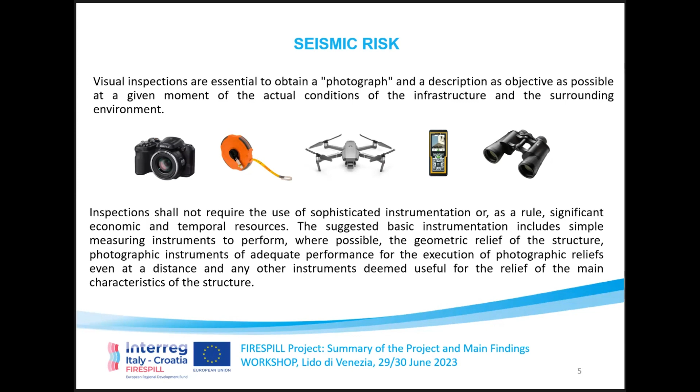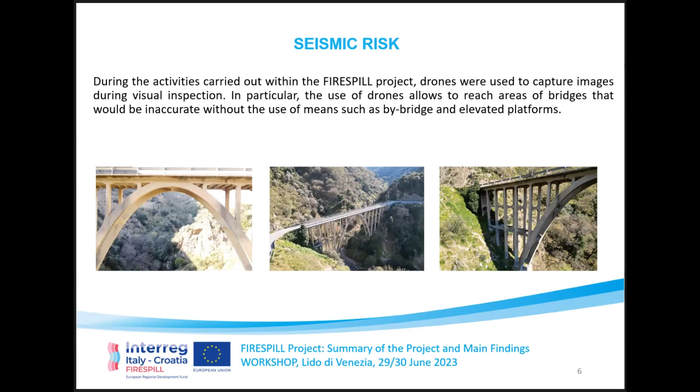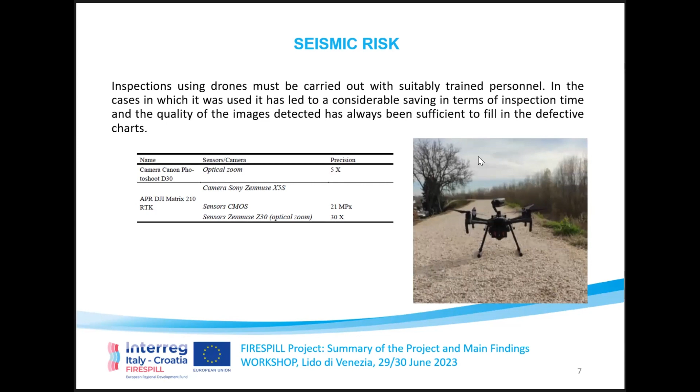During the activities carried out in this project, drones were also used to capture images during this visual inspection. In particular, the use of these drones allows reaching areas of bridges that could be inaccessible without the use of bridge inspection units or platforms. The inspection using these equipments must be carried out by trained personnel. Here we can see some characteristics and equipment of these drones, so our instrumentation.

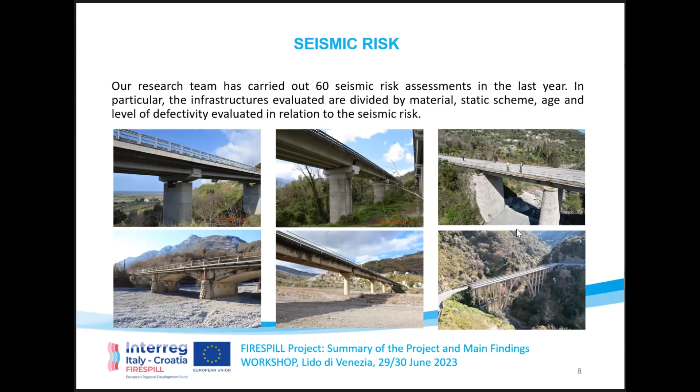So the research team for this part has carried out 60 seismic risk assessments in the last year. Here we can see a series of photos for different types of bridges. These infrastructures were divided by material, static scheme, age, and the level of defectivity that will be evaluated in relation to the seismic risk.

Based on this survey, the most common level of defectivity is medium, and this reflects the fact that almost half of these infrastructures were built after 1980. Most of the defects found concern the support devices. This is very important if we think about an earthquake. And this parameter, the defectivity, will affect the level of seismic vulnerability.

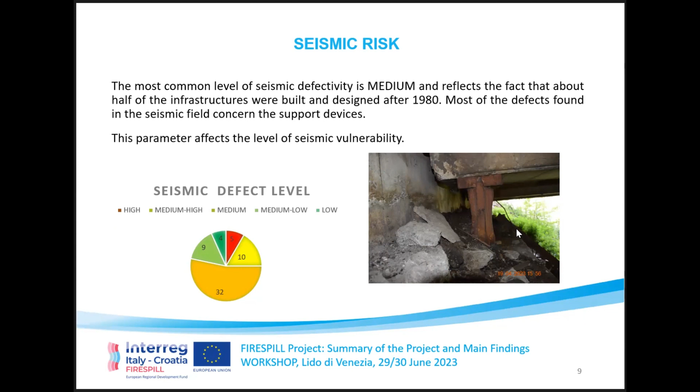This deterioration directly impacts the evaluation of this vulnerability, and the deterioration scenario collected during the surveys in this project showed a strong correlation between the defect levels and the related seismic vulnerability evaluation. Looking at the results, almost half of the cases are in a medium class of vulnerability, 25% in a medium high class, and 10% in a high class of vulnerability.

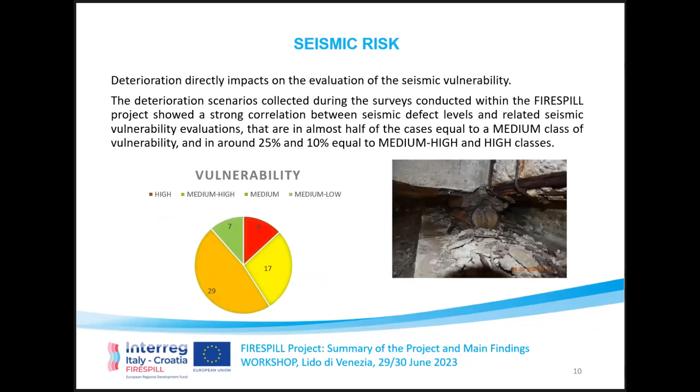Okay, I will proceed. After having contributed to enforce the skill and the capabilities of the Veneto region fire brigades in the field of technical triage, our department expanded the target audience. So, considering the importance of expeditious surveys for the adoption of appropriate measures in the post-seismic phase by the competent territorial bodies, a seminar called Operational Indication for the Coordination of the Impact Assessment and Damage Survey Activities and Post-Seismic Usability of Buildings was organized at the end of June at our department.

This one was addressed to AEDES qualified technicians, local government officials, and civil protection, with the aim to obtain a coordination in the activities between the fire brigades and the civil protection and these technicians that are involved after seismic events.

Okay, so moving to the last part of our activities. As I said before, there was also an investigation of the earthquake-fire interaction in different types of structures. So pre-stressed concrete structures, steel structures, wood structures and masonry structures. Here, I just briefly pointed out the objectives.

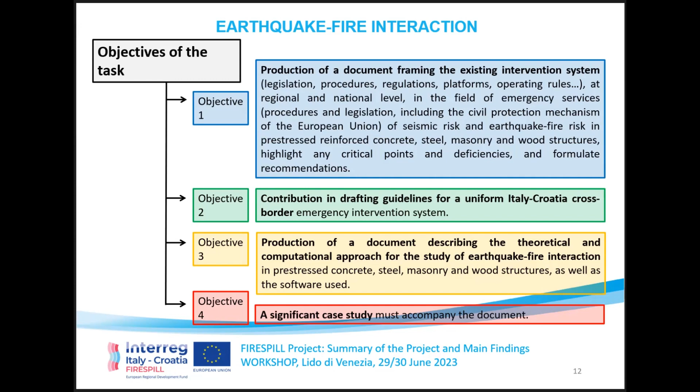And the last two objectives were the production of a document describing the theoretical and computational approach for the study of this interaction. And finally, a significant case study was inserted in the document for each type of structure. So let's go directly, because I have no time, to the last two objectives, in the technical part.

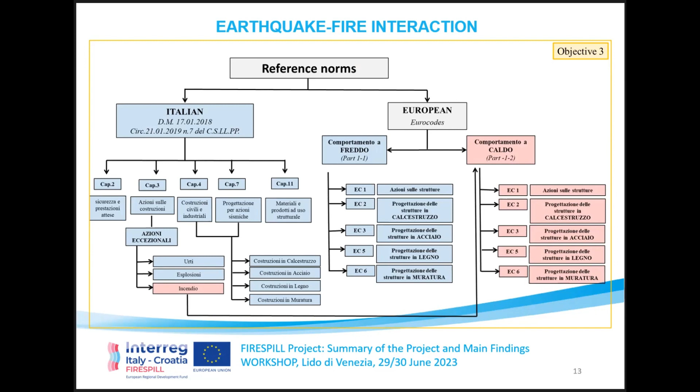Here, I just put together the standards that found application in this work. In particular, here we have the DM of 2018, it being understood that with regard to exceptional actions such as fire, the same refers to the application of the Eurocode, as far as it involves the behavior of the different structural types.

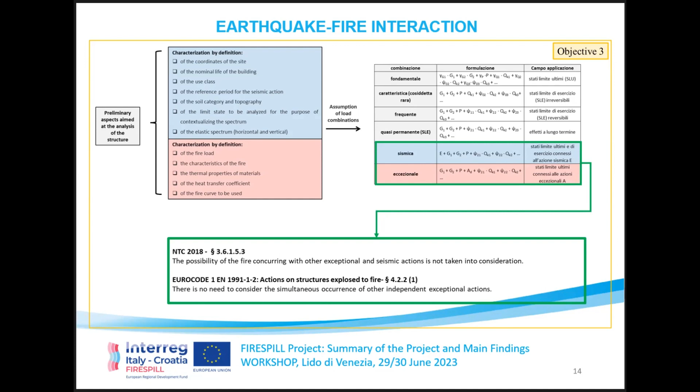And as can be seen here in this slide from the chart above, the standard provides for two distinct load combinations, one seismic and one exceptional. Therefore, there is no concurrence of the two actions. Similarly, Eurocode 1 points out that there is no need to consider the simultaneous occurrence of other exceptional actions.

So, the work done here in the FIRESPILL project was, let's say, a numerical work that was done considering different types of structure, and the numerical models that we will see here were done in Abaqus.

In the particular case presented here, we will start from the first structure that is made of steel. The application of actions was considered as a sequential application. First of all, we have the vertical load, then we assume a horizontal action of seismic nature, and then at the end, the exceptional action. So we conducted an entire analysis from the beginning till the end, considering this sequence.

So in this slide here, we just put, okay, let me, okay.

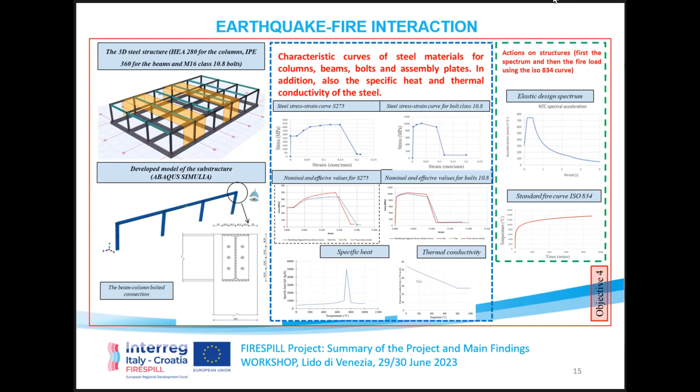In the central part, we have the characteristic curves of our materials, the steel used for the structure and then for the bolts. And we also have the specific heat and thermal conductivity of steel. Everything was considered with the variation, considering the seismic event and also the fire event after this. Special attention in this first analysis was given to the connection, applying, as mentioned above, the elastic spectrum and then the ISO fire curve.

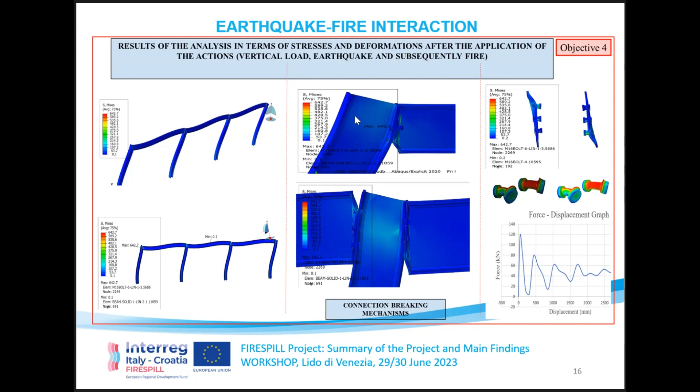One thing that I forgot to mention before is that in the figure on the left, the deformation of the substructure was related to the vertical load and after the seismic load. While in this figure here, we see the results of the stresses at the end of the analysis, so with the fire curve applied after the seismic events.

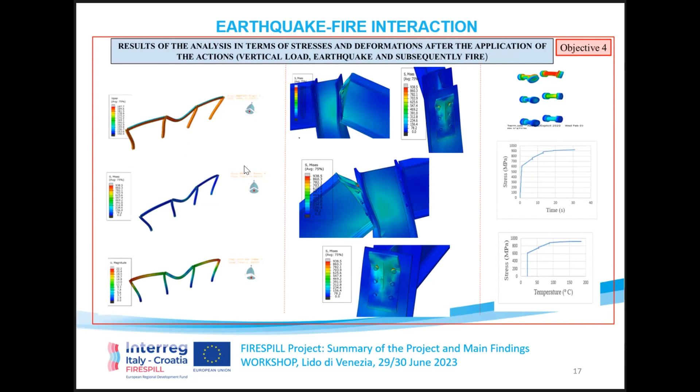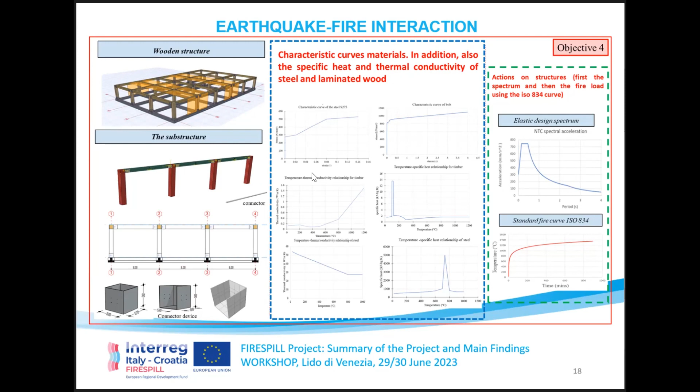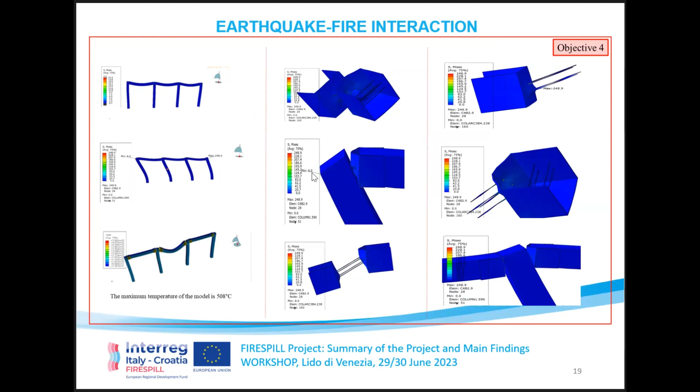While in this second figure here, for the same wood structure, we have considered the stresses at the end. What I didn't point out before, and I would like to point out here, but also for the previous example, is that in the case of this connection we have a rise of our stresses when we move from the seismic event and proceed to the fire event. So passing from one event and adding the second one, we will have almost a 50% increment of stresses at the end in the connection. So it's important to understand better these points in the structures.

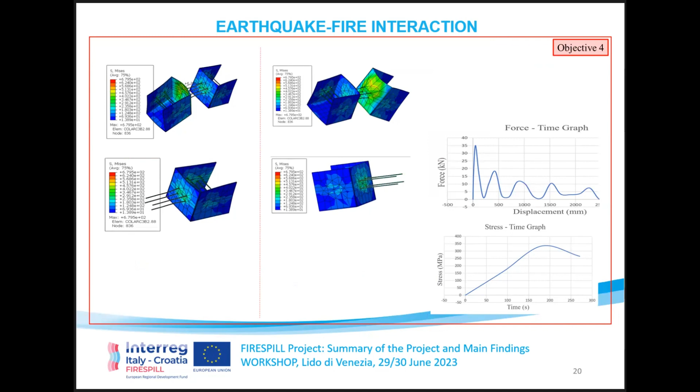Okay. Sorry, this is not the last, we have just a last slide on the masonry structure. We have before the pre-stressed concrete structure here. In this case, we consider a concrete structural element that was forming part of the roof of an industrial building. All the analyses were done in Abaqus. Here we analyzed, first of all, a 1 meter element of this part of the roof of the building, to calibrate the thermomechanical behavior of our material.

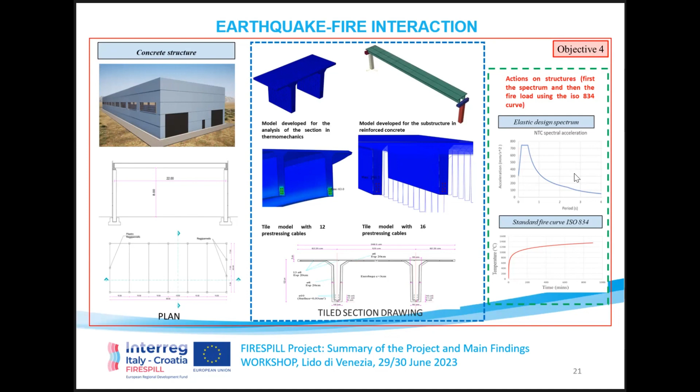Here is reported the geometry. As before, we reported the actions that were applied in the same manner with the same sequence. And here we can see some results: the thermomechanical analysis related to the 1 meter long tile section, the stress contour for the different steps. First, here we see the stress for the pre-stress definition, and the highest value for the stresses is related to the wires inside that were pre-stressed.

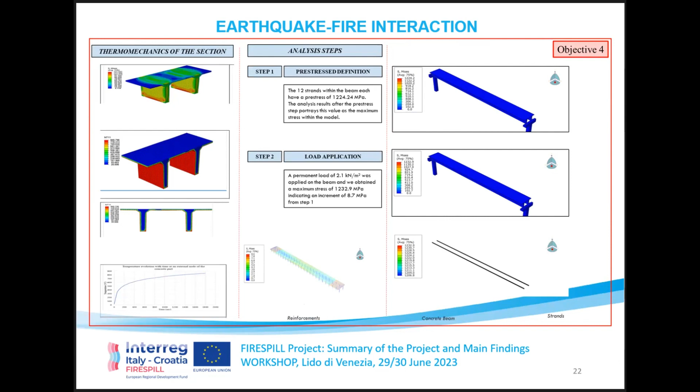Then we have the application of the vertical load as step 2, with a representation of the stresses for the entire structure and then for the strands and the reinforcement. In the central part, we see the stress level in the structure with reference to the seismic load and the temperature load application. What is seen on the right refers to the previous cases. This value of 8.7 megapascal, the maximum here, is related to the concrete beam for the pre-stress condition, while the second one for the reinforcement and the concrete beam is related to the vertical load application.

Okay. Okay, perfect.